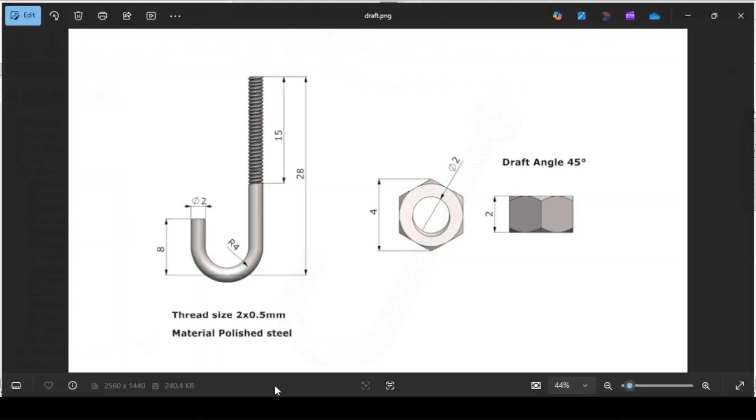So the dimensions on the J-bolt, this full height is 28, this is 8. The height of the thread is 15 millimeters. The diameter of the bolt is 2, and the radius that forms the J shape is 4. The length on this nut is 4. The hole in the nut is 2. The width of the nut is 2 also. And the draft angle, which is the angle of inclination on this face of the nut, is 45 degrees.

The size of the thread for both the bolt and the nut is 2 by 0.5. The 2 is the diameter of the shaft on the bolt and the diameter of the hole in the nut. And the 0.5 is the pitch of the thread, both on the bolt and the nut. The material for the bolt and nut is polished steel. So this is very simple to do. Make sure you watch the video to the end so you know how to model this J-bolt and nut and give it the screw motion.

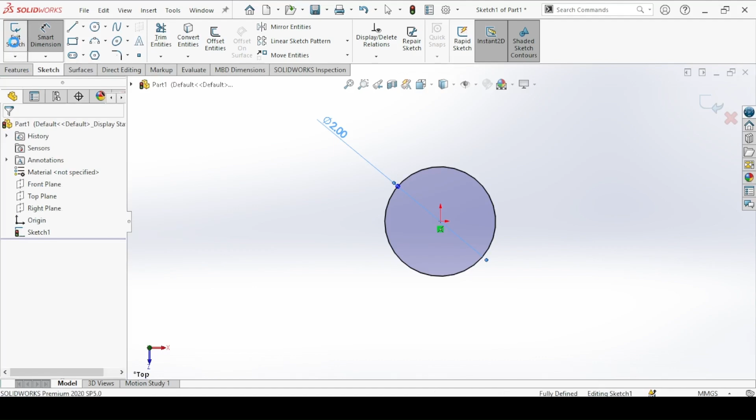First off, we create the shaft on which the thread will be. So it will be a cylinder of diameter 2 millimeters and a length of 15 millimeters. So extruded boss base on the top plane. Circle of diameter 2. Exit. And you're extruding downwards, so reverse direction, and a length of 15 millimeters. Okay.

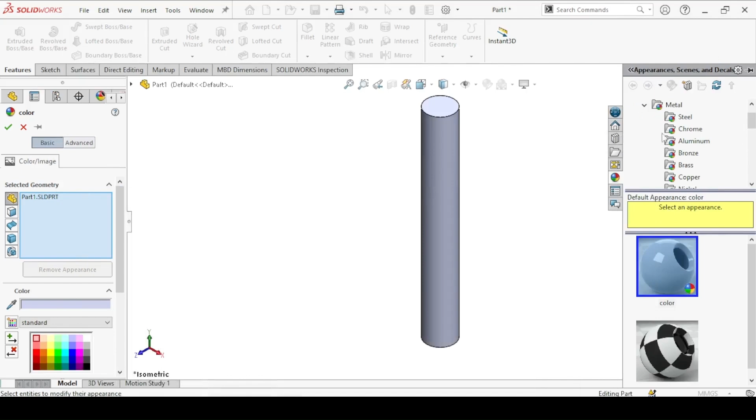And we can change the background to plain white, and the appearance of the material, it is polished steel. So on the appearance, metal and the steel, we go for the polished steel. Okay. Next, we create this section. So create a sketch, and the sketch should be on the right plane. So we create a guide that will be a curve, that will be the J shape, and then we sweep a circle around it. So first we get a vertical line here.

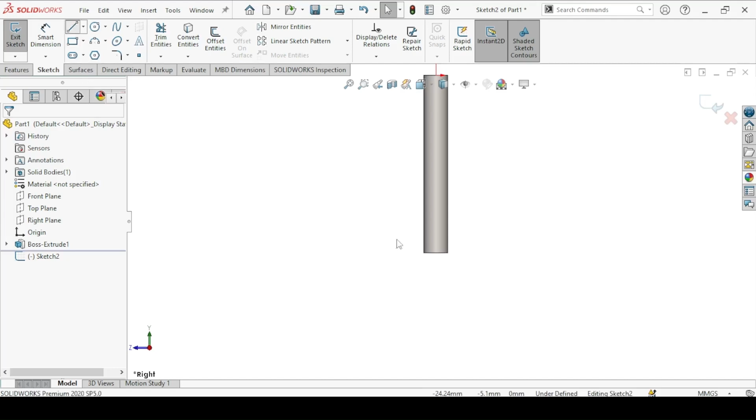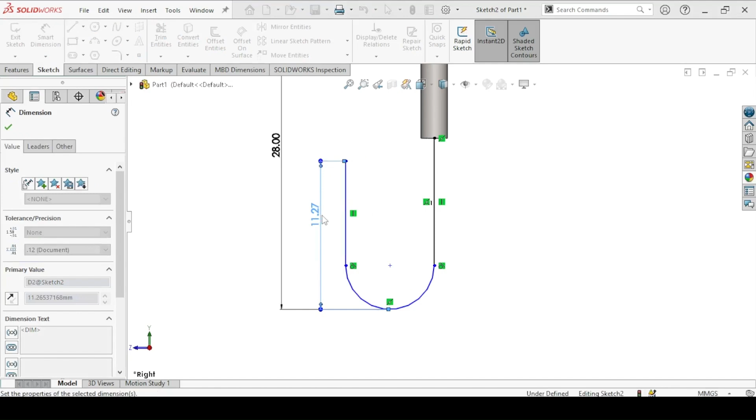Move your cursor, come back to the point. You can now draw an arc and a vertical line. Now the distance from this endpoint to the tip of the arc is 28. This is 8 and the radius is 4. And from this point to this endpoint, 28. So from this point to the end point here, 8. The radius of this arc, 4. As we can see, sketch fully defined, so exit.

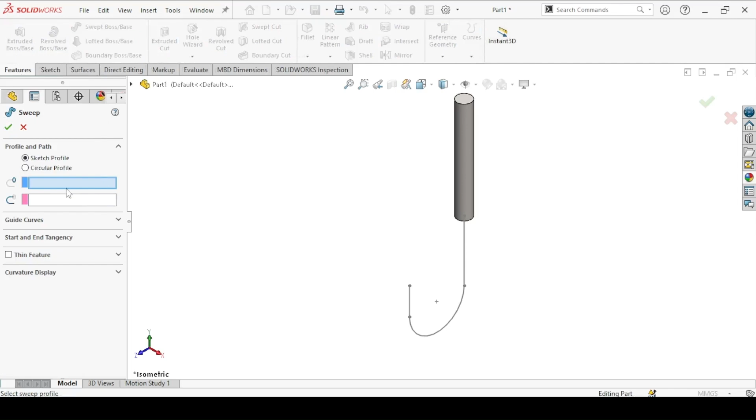Now under features, swept boss base. And we use a circular profile because, as we can see, it's a circular profile through all. So the guide, click on this sketch, and the diameter is 2. Okay, so we want to merge these faces. So click on the sweep, edit feature, come to options, merge tangent faces. Okay, as we can see.

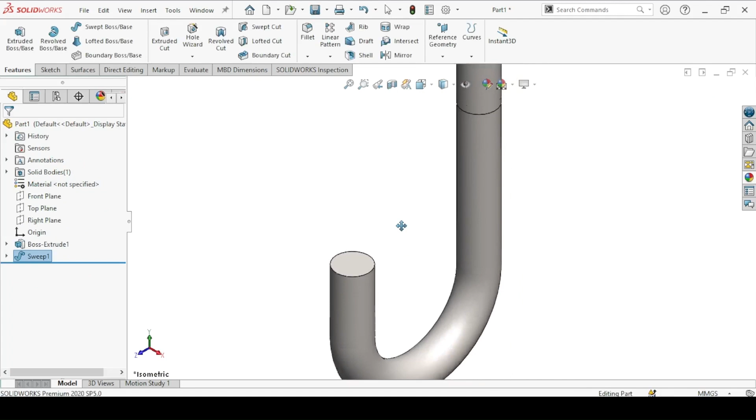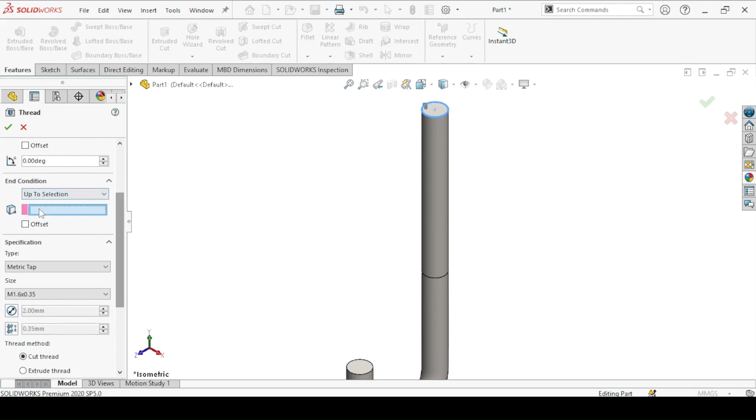So the last thing is to add a thread. So we start the thread here and end on this edge here. So with the thread feature, the start point, click on this circular edge, and the end point up to selection, and then select this edge. Now on the start point, we want to add an offset so that when the thread gets to the end, it will be a perfect shape at the end. So add an offset, reverse the direction. So this is how the thread will be like.

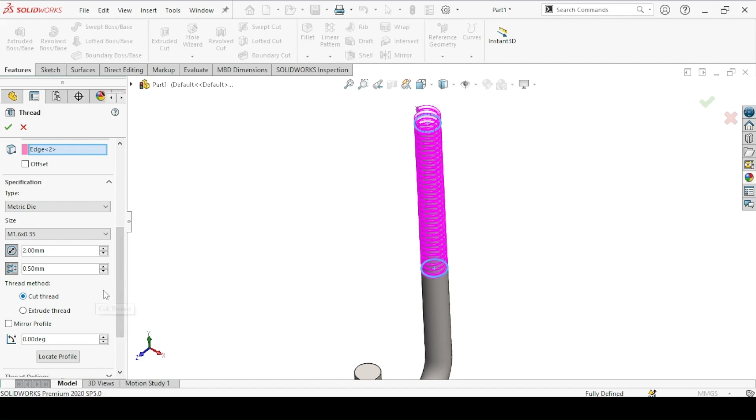Now since this is a shaft on the bolt, we use the metric die, and the size of the thread 2 by 0.5. So in the default thread size, we don't have it here, so you can override diameter and override pitch. So 2 by 0.5. Cut thread. Okay. So this is the J-bolt.

Save. In your desktop, we have the J-bolt assembly folder. The first part, bolt. Rebuild and save. Next, you create the nut. This is a normal hexagonal nut, very simple. So create a new part file.

Extruded boss base on the top plane. So we have a hexagon, a polygon with 6 sides, and the distance from this tip to this tip is 4.

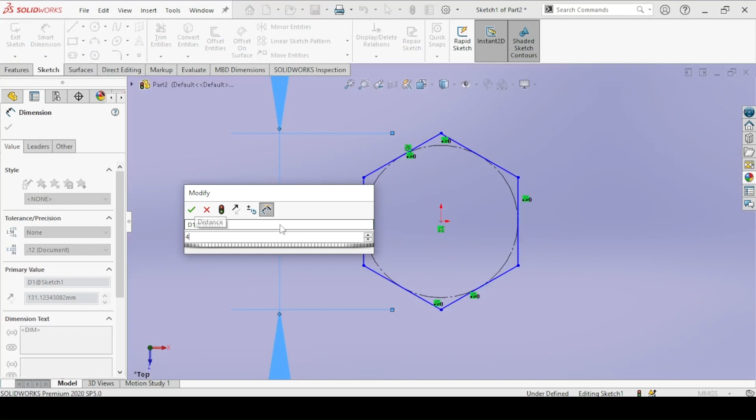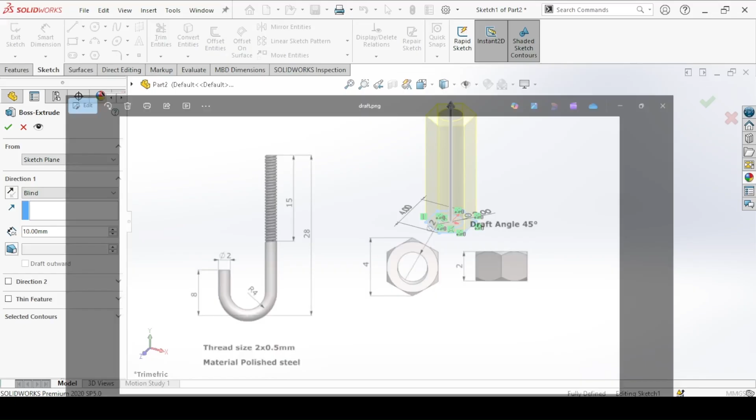And click on this line and make it vertical. Sketch fully defined. So we add the hole, a circle of diameter 2, exit. The width of the nut is 2 also. We are going to make it symmetric since we are smoothing the faces here. So we just extrude via the mid plane, then we smooth one face and mirror onto the bottom here. So end condition mid plane to distance.

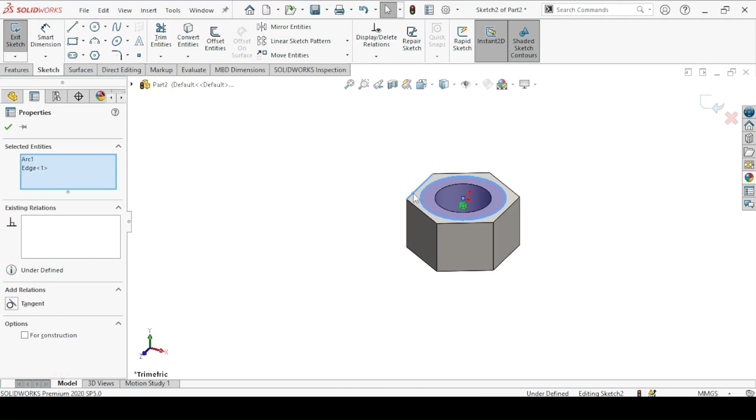Okay. Make the background plain white and the appearance again polished steel. Now extruded cut on this face. So a circle, and then you make the circle tangent to the edges here. So hold Control key, click on these edges, make tangent, exit. Now flip side to cut, and the draft angle 45 degrees.

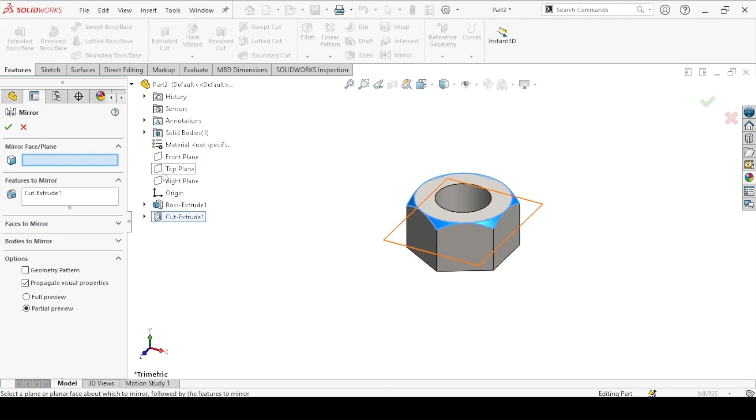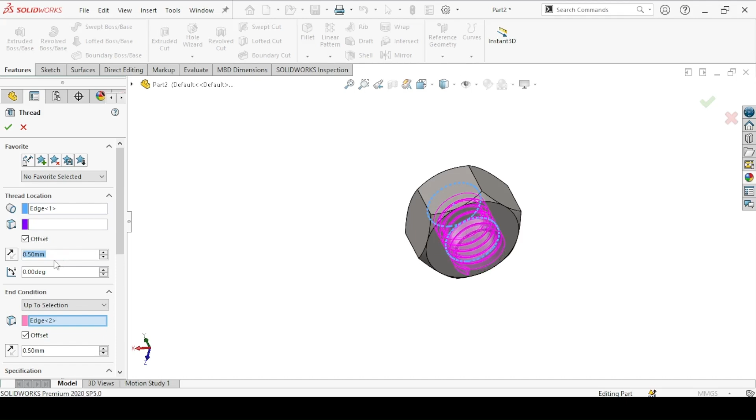Okay. Then we mirror. So click on this cut extrude and mirror. The mirror face or plane should be not the front plane, it should be the top plane, as we can see. Okay. Then we add the thread. So again with the thread feature, the start location of the thread here, and the end location here. Again, we can add offsets of, let's say, 0.5 to both edges for a smooth thread on the end points. And this is coming inside, so reverse the direction for it to go outside.

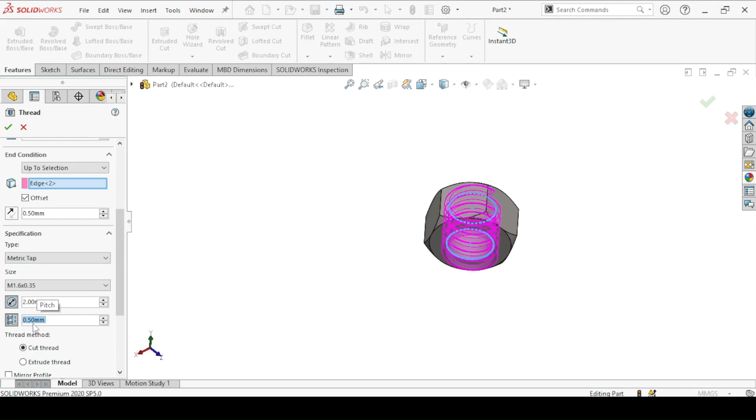And now the type of thread should be a metric tap. Since it is a hole, we use the metric tap. And the parameter of the thread, or the size of the thread, should be 2 by 0.5. Cut thread and OK. So save, and the second component, nut, rebuild and save.

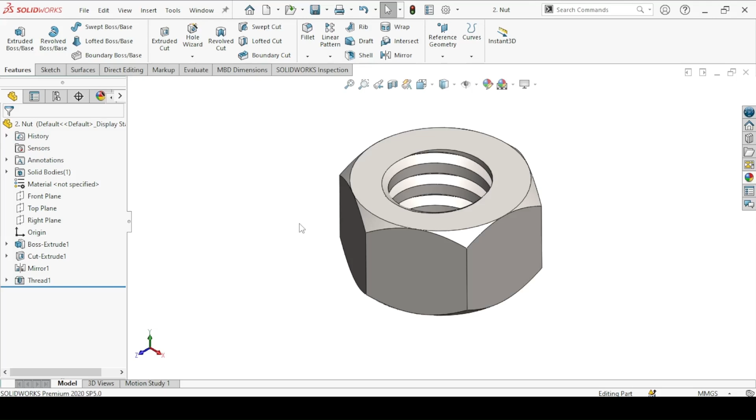Finally, we create the assembly. So a new file, this time an assembly file. And this is our assembly workspace. Now these parts are opened here because they are already opened. There is no need to navigate any folder to get to them. So close. First off, I want to make the origin visible. So view origins. And then we can insert the first component.

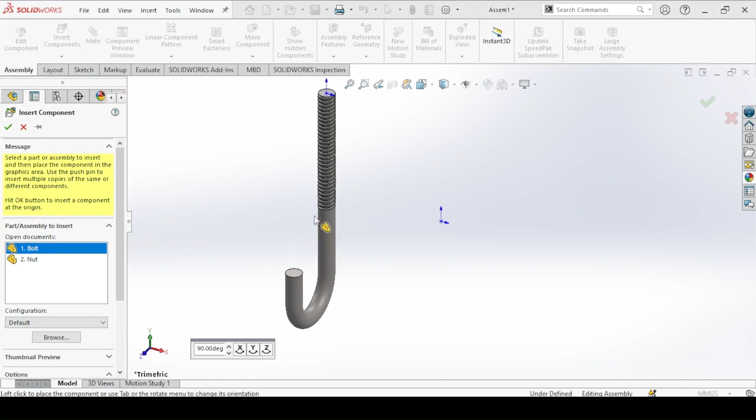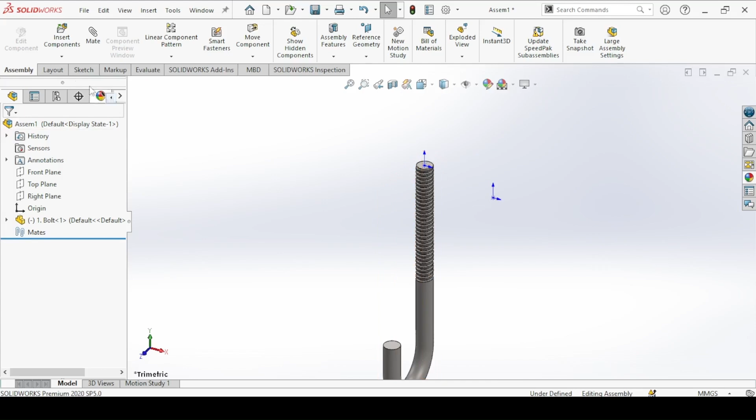So come to insert component under assembly. And the first component is the bolt. So click and drag the mouse. Click. By default, the first component we insert is fixed. We cannot move it. So right click, float. Now we can move it. We want to fix these 2 points on top of each other. So under mate, coincident, and click on these 2 points. Okay.

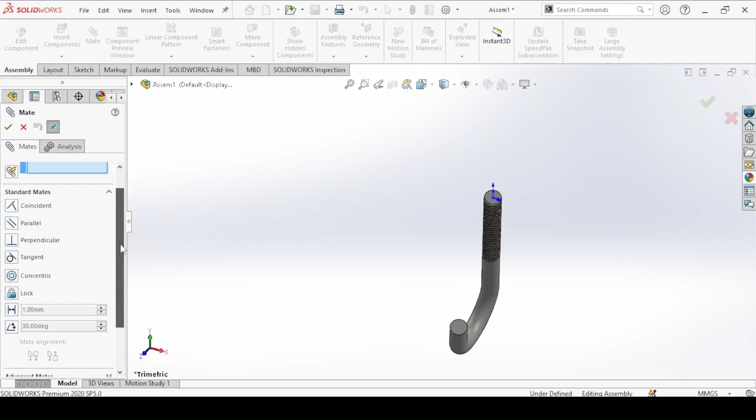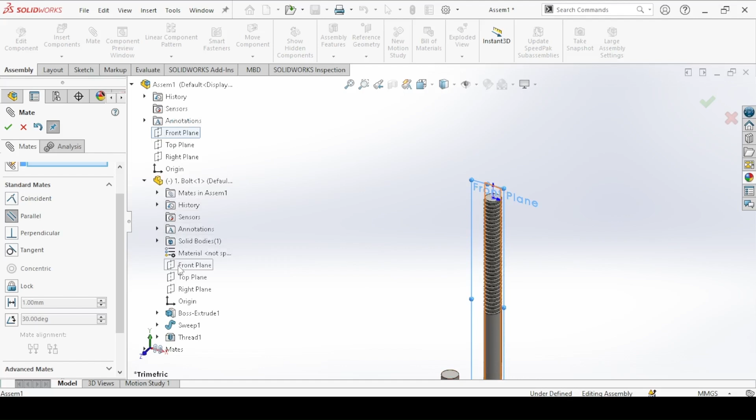So as we can see, this is the J-bolt. Now we have to fix it very well. So again under mate, parallel, and we want to mate the top plane of the assembly workspace and the top plane of the bolt. Okay. Again, we make parallel the front plane of the assembly workspace and the front plane of the bolt. Okay. So we can see fully defined assembly. And now we cannot move the J-bolt in any direction. And we disable the origin.

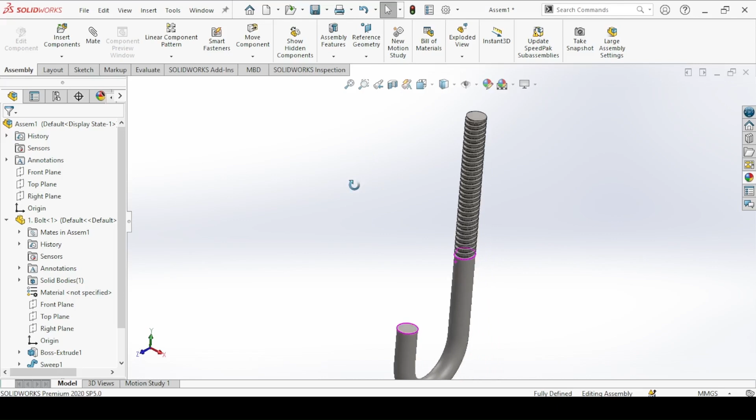Next, we insert the nut. So insert components, click on the nut and bring it here. The first mate we are going to add is a concentric mate because there are circular edges here. So concentric. So get an arc here. Click. And then get an arc also here. Click.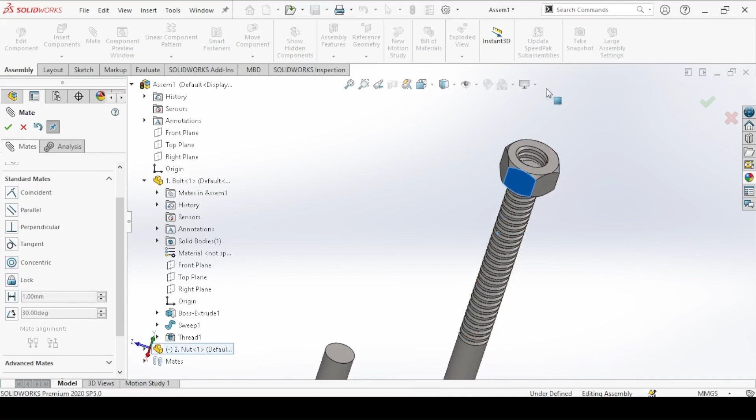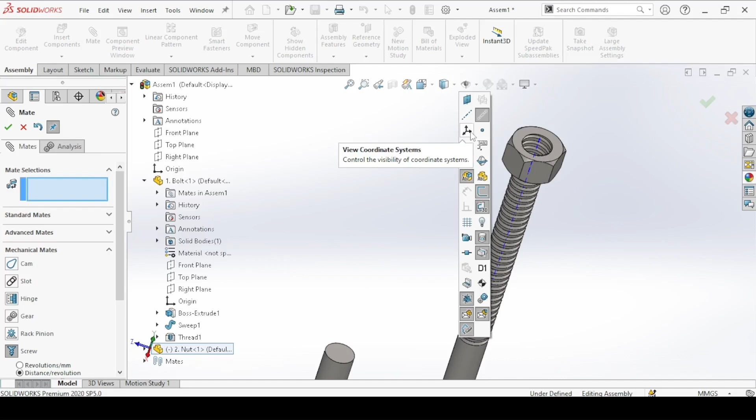Now this is moving in a normal way, but we want to give it the screw motion. So come down under mechanical mate. The screw mate is here, and the distance per revolution we want to say 5 millimeters per revolution. So per 1 revolution we want to move by 5 millimeters. And then under mate selection, we make sure the temporary axes are showing. And we select the axis of the nut and this axis of the bolt. Okay.

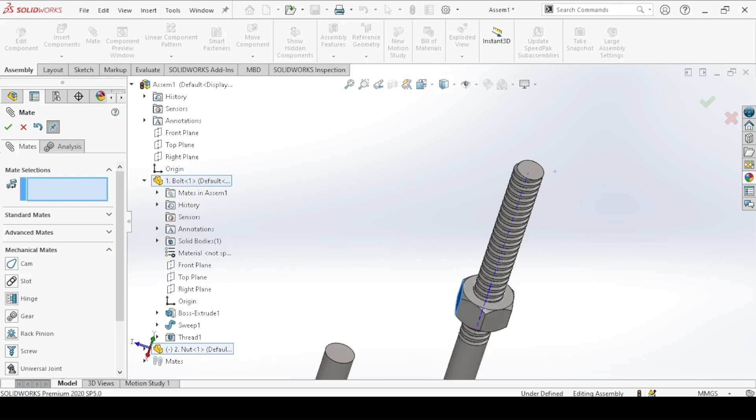So this is what we have. When you click on the nut and then you rotate with your mouse, you can see the nut is moving, just as a bolt and nut will move in a screw motion. But there is a problem here. You can see the nut is moving even when we exceed the thread. It is moving, so we are going to fix that. So disable the temporary axis, and then we want to give it the limit distance mate.

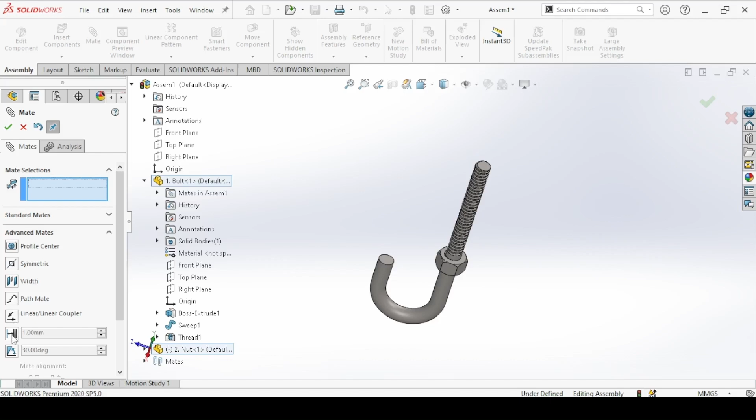So under advanced mate we have the limit distance. So click on it and then we select the 2 faces to get the limit distance. So we need this face of the bolt and then this face of the nut. Now we have to get the maximum value and the minimum value. Now the minimum value, we want them to align. So the minimum distance should be 0.

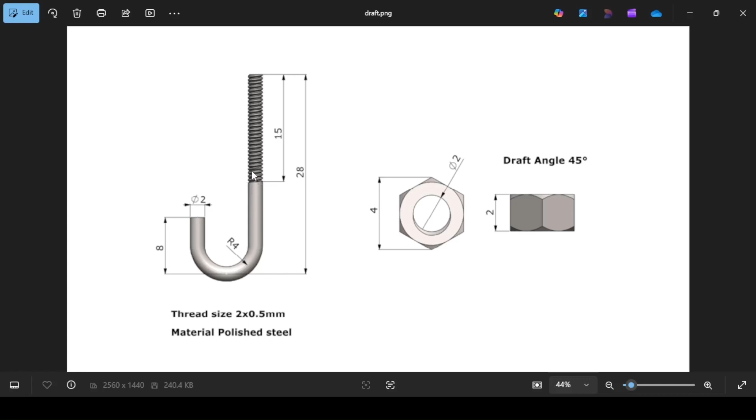And the maximum, since the total length of the thread is 15, and we want the nut to be somewhere here at the end point here. The width of the nut is 2. So 15 minus 2 is 13. So the maximum distance should be 13 millimeters. Okay.

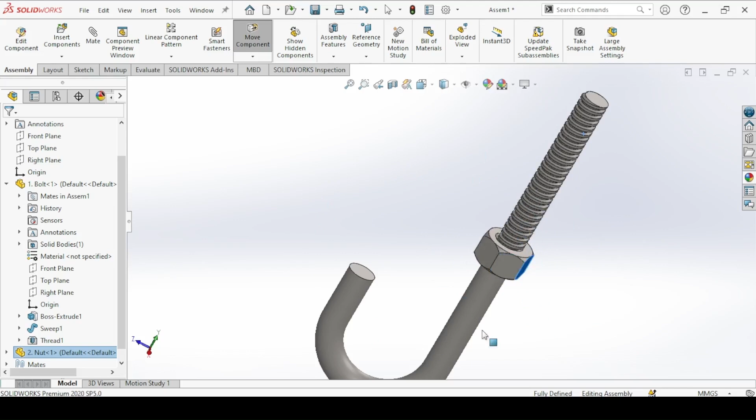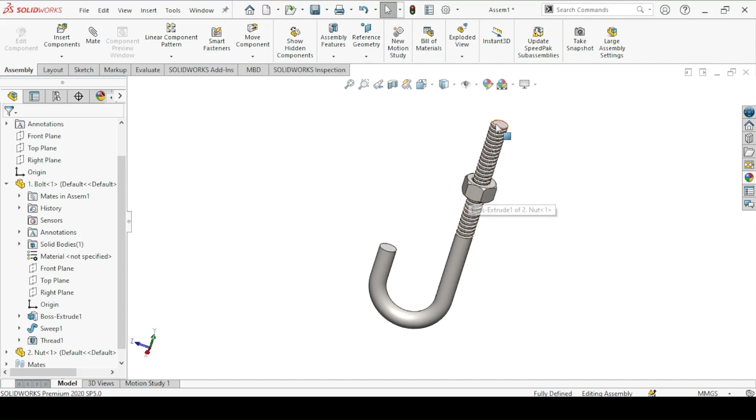So we can now click on the nut and then rotate it. You can see when it gets to this limit distance, it doesn't move again, and then it will come down. When it gets to this limit distance, it will not move again. So yeah, that's how to model the J-bolts and the hexagonal nuts and give them the screw motion so that the hexagonal nut moves only across the length of the thread.